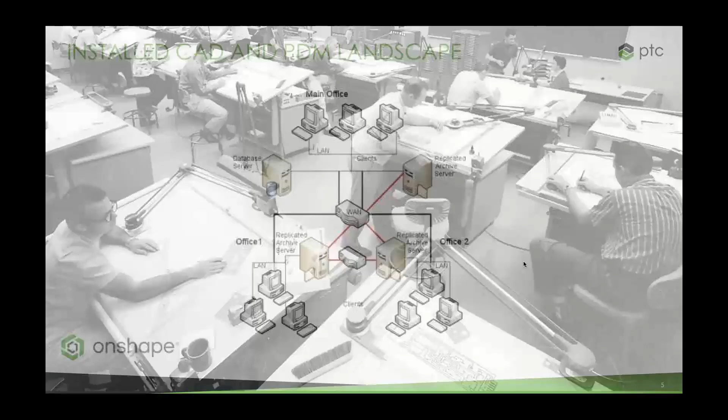But if you look at this drafting room, I love this image because it tells a nice story. This drafting room really isn't any different than what we're doing here, okay? There's a database server and archive servers. These archive servers, think of these as filing cabinets, right? These archive servers are where all the files are being stored in these filing cabinets.

If we go back again to the previous slide, we have a database server. The database server might be a logbook that one of the administrators is holding on to. You can see the administrators in the front of the room kind of keeping guard over the files in those drawers that you see right there. And when an engineer wants to take a drawing out, they go to the administrator, who notes who it is, they take the file out of the drawer, and they make a copy of it on a blueprint machine immediately.

And then the engineer works in the original, and they take their power eraser. You can see the Alvin tape dots and the brush right here for brushing off the erasures, coffee cup on the table and everything, right? It's kind of fun to see. I'm actually old enough to remember starting my days in this space.

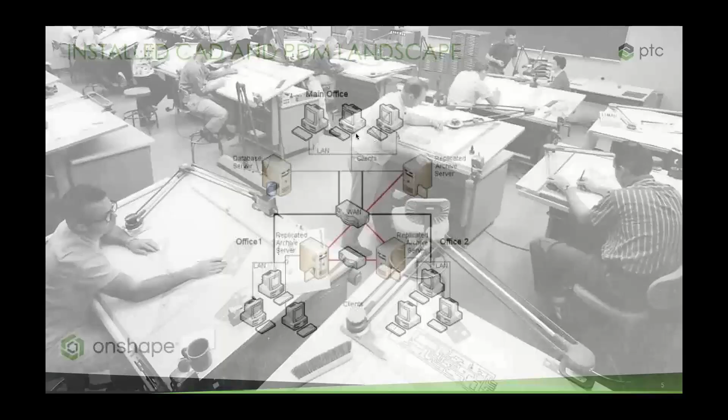But if you think about this room, when we went through phase 1 of digital transformation with CAD and PDM systems, all we did was really duplicate this file folder based process that you see on this screen right here, okay? And that was fine as a step 1, but we have better technology now.

We have database driven CAD systems like Onshape that don't even require you to take a file out of the file drawer. You can even have people essentially working all together on the same drafting board on a top level assembly together because of our database driven nature. A PDM system is a glorified file copy machine. It's essentially duplicating this entire process.

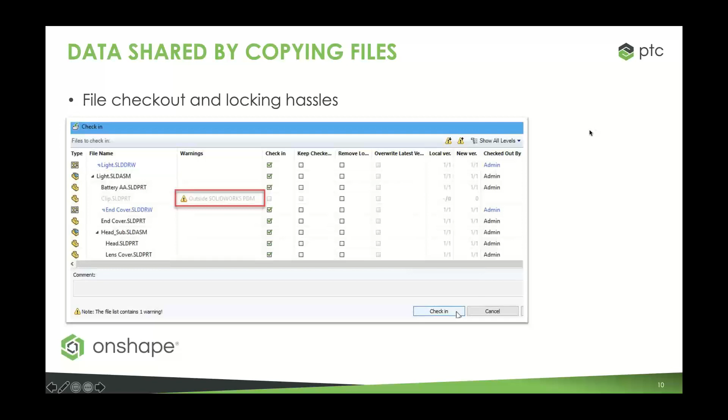So essentially, just to reiterate, a PDM system just duplicated that process of taking a file out of a drawer on the server in this case, copying the file to the local engineer's desktop, the drafting board over here, and they make their changes and then you put them back into the vault. That's all a PDM system's doing. At the core, there's workflow and other fancy bells and whistles, of course, but this is fundamentally what's happening. And there's a database that's the overlord of everything, watching and recording everything that's going on.

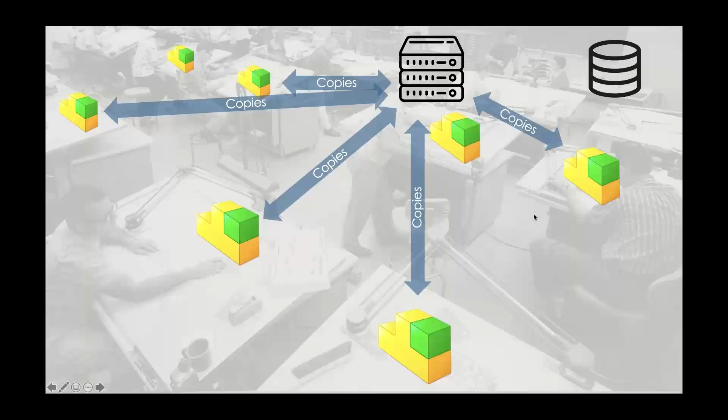And people are like, oh, well, why don't I just move that to the cloud? I'll put my PDM server and all my infrastructure hosted on AWS or Azure or something like that. It's the same thing. Still have all the file copies. In fact, it makes the problem worse for the engineer. It makes the IT guy's life easier because they've just smacked their hands and they're like, okay, nothing to do here now.

I'm good. So the IT guys put it on the cloud, which I commend them for because it's an efficiency. It's a way of saving cost and money. Electric bills and server rooms are pretty expensive. But the end engineers don't get any benefit whatsoever because their life is actually worse because the file copy time is slower because they have to go to the higher latency of a cloud file exchange.

Okay. And when Onshape put itself together, we decided that this wasn't going to be a tenable situation. So I'll explain how we did it. But let's reiterate the challenges to concurrent design a PDM system gives you as a company. Because of the checkout based process, only one person at a time can work on a file. PDM and a normal Windows file system is going to be the same thing, right? You can only have one person in any file at a time.

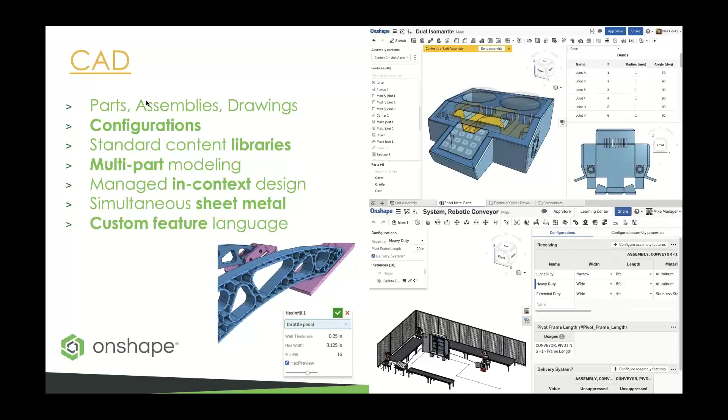So, to do this, though, we had to build a new CAD system to actually do it. So we have a CAD, like you're used to. It creates parts, assemblies, and drawings, and has the language of the everyday engineer taken into consideration. But we also included the data management at the core. So every user of Onshape gets version control from day one.

That's fully hosted. Every single change is recorded. You can go back, view, compare, and restore. You can even branch off of different design ideas to explore and iterate. This is very similar to GitHub, where you can create design branches if you're doing software code and things like that. But it's just built in at the core. So it's kind of even better than GitHub, because you're not managing code snippets and uploading them to a repository. Everything's happening on the fly.

So it's really an elegant solution for managing your data. The most elegant I think I've seen personally. The moment I saw Onshape and got wind of it, I quit my job and joined Onshape. That's how strongly I felt about this, because I just know how much of my life I've wasted installing software, managing services, servers. I hate to think about how many hours of my life I've spent on that.

It's years, years of life I've spent installing and configuring and maintaining software. And with Onshape, there's zero of that. I have nothing to manage whatsoever. Okay. Just need to work on designs and doing designs the right way, right?

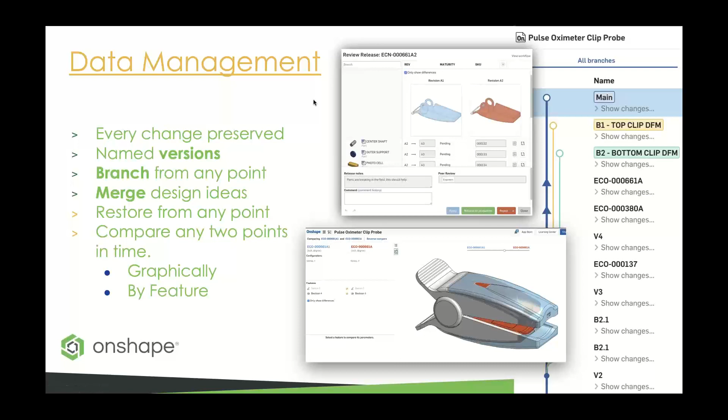But because we've moved this to a software as a service type solution where you don't have to worry about those things, there are other benefits now that you can pile on with this unfair advantage that we have now, right? There's communication tools built in, Google Docs style communication tools where you can see other people in a document and even work together at the same time, right? Have design reviews, comments built right in to the designs, and markups. Design review tools called the follow mode. I'll try to show that.

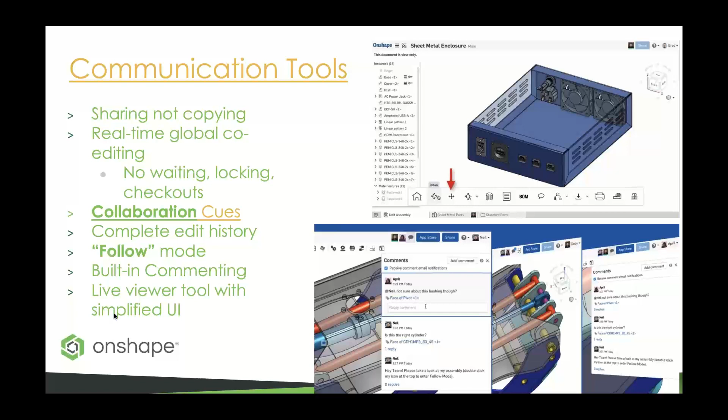And view-only users don't need to install fancy separate viewer software. The CAD system becomes a viewer for people that only have read-only rights to the design. So that's something that you get for being on SaaS and on Onshape.

And if you're Onshape Professional or Enterprise, so there's 3 levels of Onshape: Standard, Pro, and Enterprise. Standard's like for your single person consultant, but if you're on Pro or Enterprise, you get business process definition through workflows. Onshape Professional comes with a default workflow that works for almost any situation you can think of.

This also works on mobile. So you can access Onshape from any modern device. I'm running a MacBook. People run Chromebooks with Onshape. Of course, Windows platforms are supported, but iPad, iPhone, Android devices, there's an app in each app store for installing an Onshape app on Android or iOS.

And really, it's just the data, the touch layer, so you can use your finger. Everything else is on the cloud, so it's a tiny install. But on your computer, you just go to cad.onshape.com. If you're using an enterprise, you get your own special domain. So let's just hop into it and show you how this kind of works, going from this type of workflow to more of a SaaS workflow, okay?

So let's hop out of this. I have Onshape here on my MacBook. You can see I have the Mac right here. I have a Chrome browser loaded up here. And I'm in this design for a throttle system, right? Let me just hide this for a second, hide that for a second, make the design the hero here.

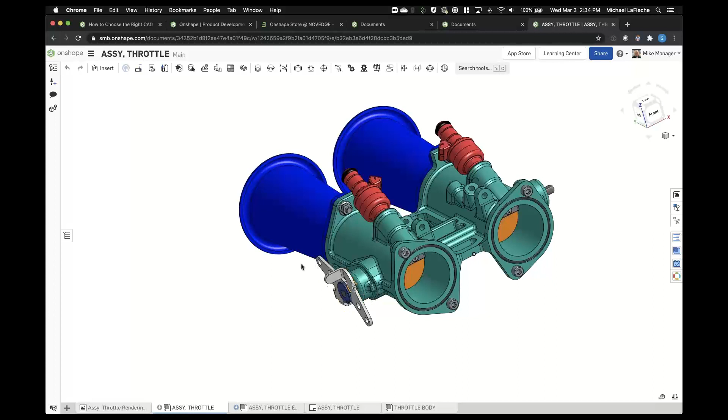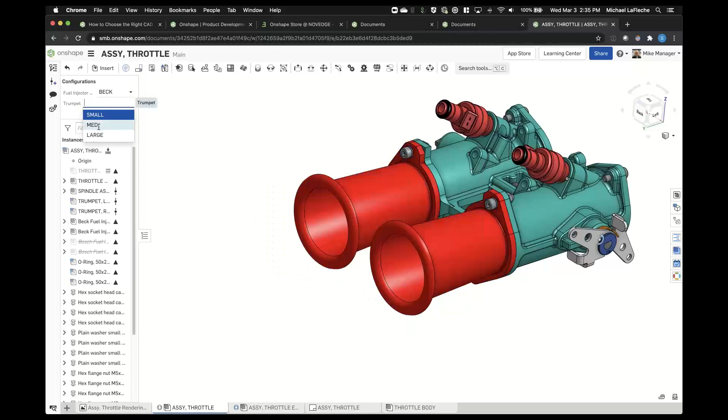And this is a CAD system, right? If I move this, it's going to open and close the inlets right here for the throttle, right? And that's a piece of sheet metal. These are machined parts. This is a casting with a machining operation. I have some trumpets here. Depending on what you're looking for, you might want to have small, medium, or large trumpets that are configurable. Onshape has variant-driven design that makes it easy to do what I'm doing here.

Maybe I want to use different types of fuel injectors. I might decide to install some Bosch fuel injectors, so I'll design those in a moment. But I have the Beck ones right here. So the CAD system is all here, but the data management is built in on the side panel. So the side panel shows me all of the changes that have been happening.

And this is something that PDM systems struggle with. If you do a file copy save as, or a pack and go, or copy tree, each CAD system calls it something different. You kind of lose the history of what that design branch iteration does, but in Onshape you don't. You see that history, and you can even merge the history into the main branch right here.

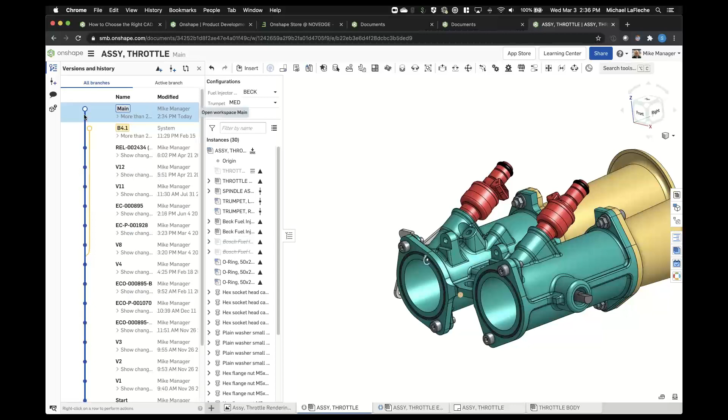The other benefit of having PDM for most companies is the where used report. So here I am on my main Onshape page where I sign in as a named user right here. Here is Mike the manager, right? And that's what Mike the manager has access to. Maybe Mike is interested in looking for the Bosch fuel injector, right?

So he's just doing a search in the system for the word Bosch, and there it is, the Bosch fuel injector. He can see where it is. He can open it. There's also great information that you can get. A lot of PDM systems offer this thing called a data card, or the item master information. So here, that's what I'm seeing.

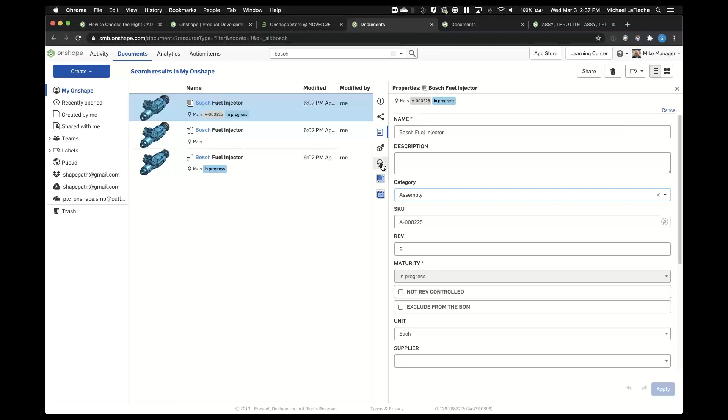I can actually click on the fuel injector, see it's an assembly, see the revision, date of it. It's in progress. It's not released yet. Here's the revision history. There is no history because it wasn't released. Here's where it might be used. It's not used anywhere. I know the Beck one was in use though, right? So if I search for the Beck fuel injector, actually I already did right here, I can get that report right here on the side.

And I can look at any place where I've released it. So I have a Beck fuel injector that was released under ECO 225, and it's used in this assembly, and I can open that directly from the CAD and data manager view into this right here. So it looks like I opened the assembly itself, but I already know it's actually used here as well. But I can also do the reverse here as well.

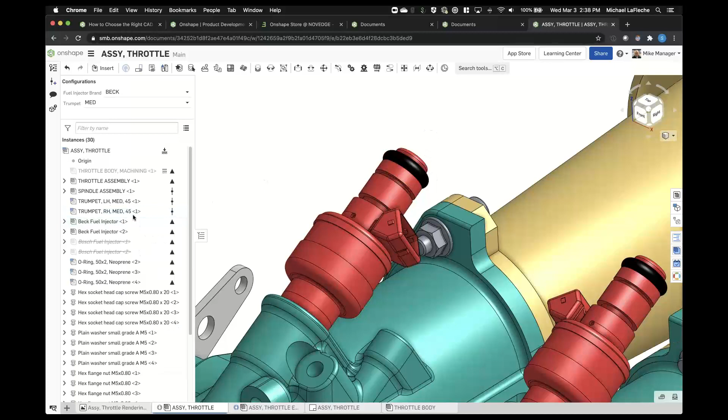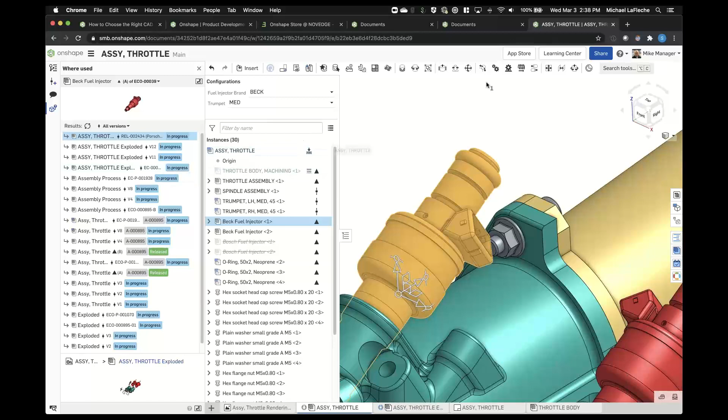I can see where else this fuel injector might be used from the CAD system, right? So if I just click here, there's the revision history, there's the where used, and I can run that where used in another way. And this is showing me all the versions and all the places where that fuel injector might be used. Maybe I only want to look at revised data, and I haven't used any revised items, only versions so far. So really pretty interesting that you can get this right at your fingertips without leaving the CAD system.

The triangles here show you the state of the design that we're using right here. Let's actually go in and look at the revision history this way. No revisions on that. Let's do this one. Nothing on that either. I'm picking the wrong ones, I guess, but that's okay. I'm going to show you how to create a revision in a second.

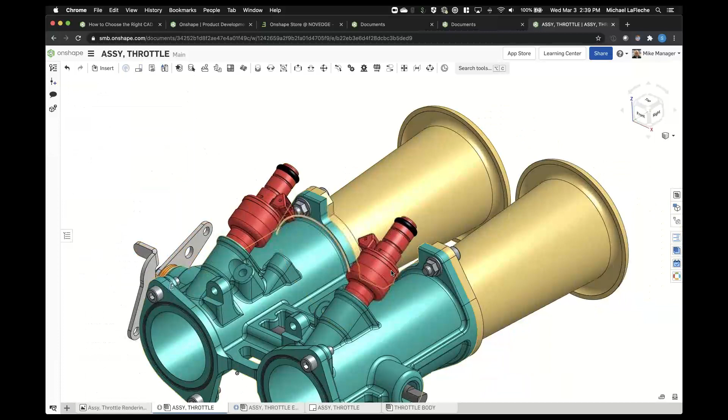So next thing I'm going to do is go to not the Beck fuel injector, but the Bosch fuel injector, because I want to add it to that design to have two choices of fuel injectors. So I'll open it up. And in this particular document, I have the Bosch fuel injector assembly ready to go, and I just want to get this approved and blessed for production, right? So here it is. It's 2 parts just like that. These are the parts that make it up. So let's release this.

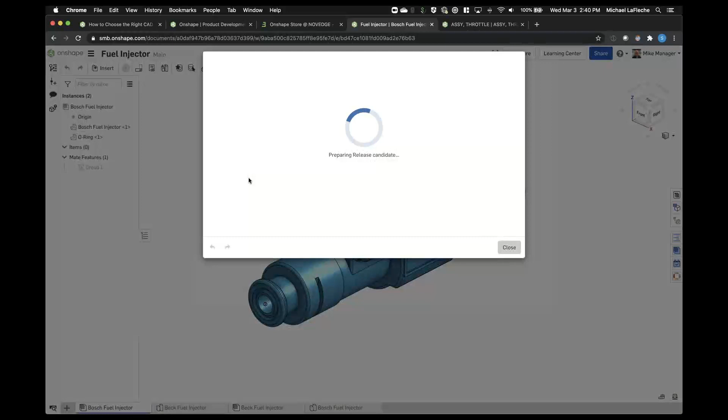And I can see here's the top level assembly for that fuel injector. It's going to go at Rev A, ready for use. The 2 items underneath it, the little O-ring and then the body of the fuel injector, are not revision managed. I've set that up so that when you buy this from Bosch, you're buying the whole unit. You're not buying the sub components that make it up. So I just block it from doing the revision management for that. And that's something you can turn on in Onshape.

And I'm just going to release this under some sort of change order number. I'm going to pick a number. You might have a system for this, but I'm just giving it an ECO number, and I want it to be approved by somebody on my team, right? I can give it to maybe Debbie, the designer, to approve this. She might be somebody who approves library parts. And I want to let the whole team of purchasing agents know that this is happening. And I'll submit it for review. And it will tell you that's being processed. This is the change management process.

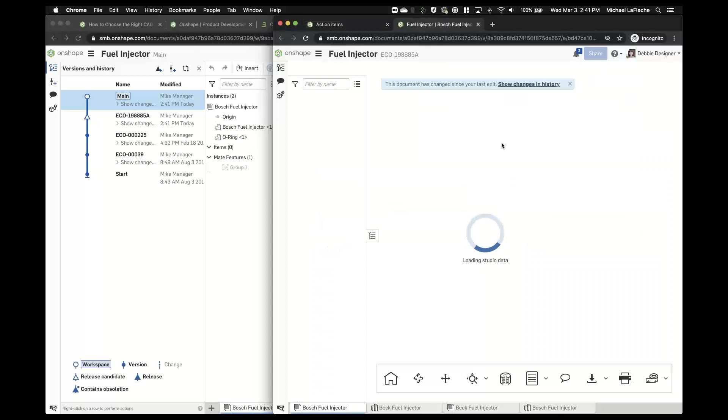We're going to see in the timeline view that ECO has an open triangle, meaning this is being worked on. Over here, Debbie, this is her window, and she's going to look at release actions, newest first. There it is, the fuel injector's pending. And she can view that release. She can click into here and make sure it's the right thing, of course. Just click on into it. So yeah, both windows, multi-window system. She can look at this, she can see it in a view-only state.

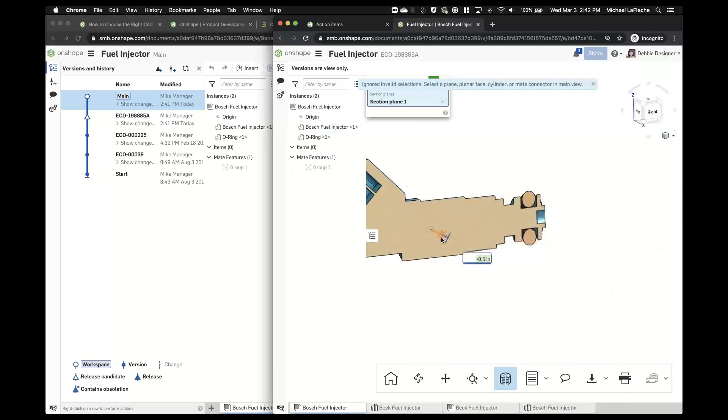She might want to do a measurement, to make sure it's the right size, right? So she'll pick these 2 things, hit this tape measure, and there's the distance right there. She can do section views right here, see what's going on. It's just a simplified model, so there's nothing inside of it. It's just that way from the vendor. They sent us a STEP file probably, right? And this looks good, Debbie.

So she's going to add a comment to Mike, the manager: Looks good to me. Make sure the label is applied to the side. And I can even tag where the label should be, and even do a screenshot if I really wanted to. That's importing one, but let's draw one on the fly.

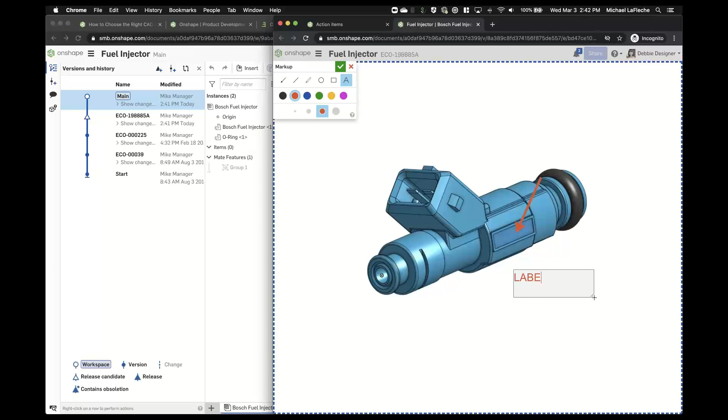Label here, right? And I can add that to the comment, right? So it shows Mike what's going on. Mike will get a notification in just a second that the comment has come through, or I know it's happening now, so I'll just hop right into it. And there it is. There's the comment in the ECO. And I can say sure thing. That's all happening as part of the ECO process, and I can resolve that comment, right?

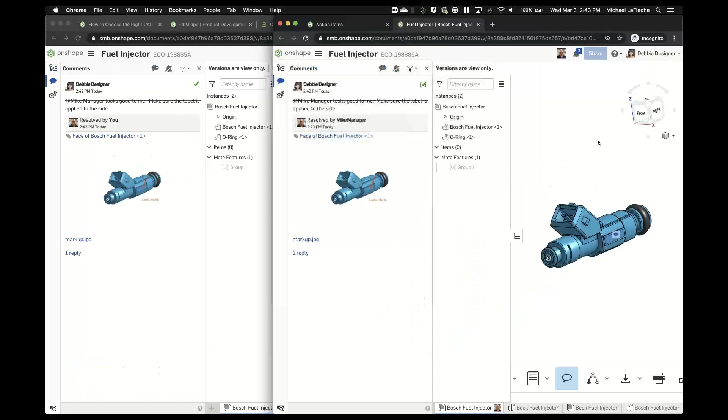Now Debbie is going to go in right here and approve it. So she goes to her approval, and she hits the release button, and immediately I can see it's entered the released state on Mike's screen. If I look at the timeline view, it's right here, ECO 19, whatever it is. And I can go to the assembly here, where I want to place it. I have a configuration set up waiting for this Bosch model to be added.

Now I can insert my recently released assembly for the fuel injector. So I know that it's made by a certain supplier, and I know it's Bosch. That metadata is already in the document. So I'm just searching my entire Onshape system for an assembly with Bosch in it. Well, maybe I didn't put it in there. I'll just search by name in this case. There it is. And I'll use the released one, of course, right? Rev A, drop it in here.

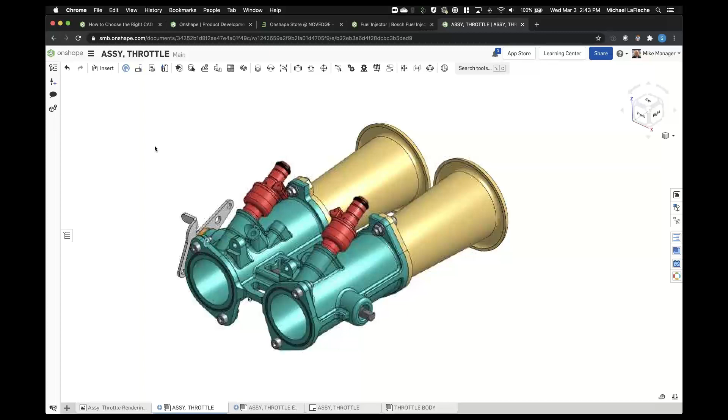So the CAD and the PDM are one, right? I'm just going to stick this in. I'm not exactly sure how it sits in here, but I'll just put it in right here and rotate it about, so it's coming in like that. It looks like a little interference there. Might need to fix that.

I guess that's why I'm not working in engineering anymore.

Let me just fix this. There's that mate. I'll just slide it back out again. Once I do it the right way, it'll be easier to do the next one because of something really cool that we have. All right, good enough for now. I just want to replicate. So a little bit of CAD, right? And I replicate the fuel injector somewhere else on the design right here.

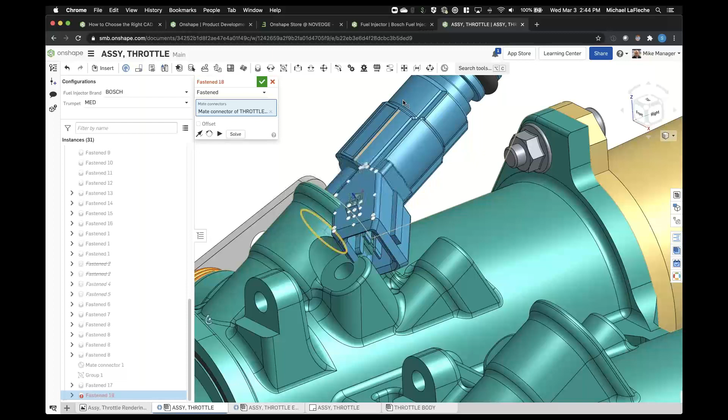I actually picked the wrong edge, so sorry. First day with my new hand, guys.

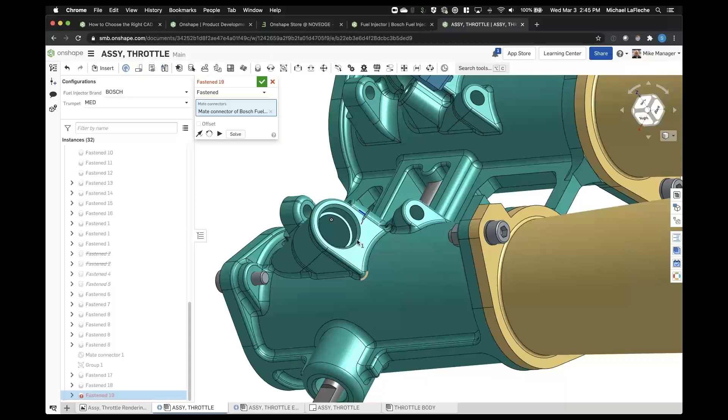I'll just put it in here. Perfect right there. Perfect right here. And we'll rotate it so the wiring comes into the inside, like that, right? And of course, my bill of materials is right here and up to date. So a lot of PDM systems have a bill of materials. So I'm getting the structured bill of materials view of this. There's my Bosch fuel injector showing up in the BOM.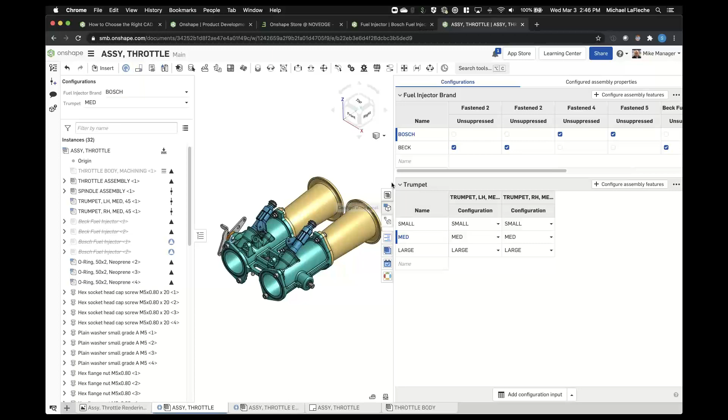But if I switch this to the Beck one, you're going to see the Beck fuel injector. And of course, I can configure whether I'm using the Beck or the Bosch fuel injectors in here as well. I haven't done that just yet, but I could if I spent a few more minutes on this. Very, very easy to do advanced configuration, control, and management here. It was almost like child's play. You didn't have to go to other systems and other windows to do this. It's all inexorably linked in here. There is no separating the CAD and PDM with Onshape. It's all the same, right?

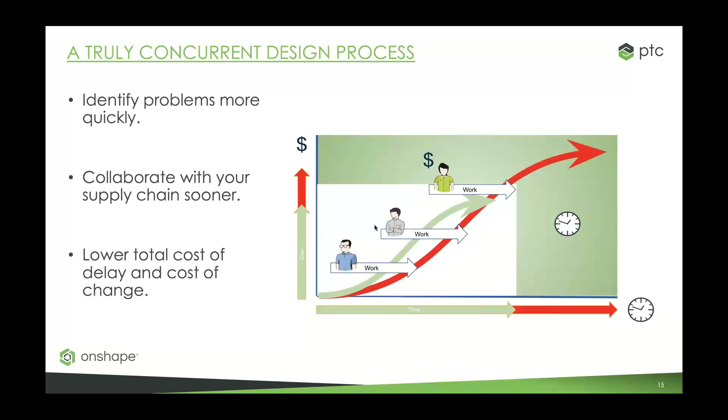So this is really the main definition of what's happening here: everything's hosted for you. You don't have to worry at all about this. I showed you how both Debbie and Mike were working on the design together. They could literally be in that same assembly and that same throttle, adding parts together. Debbie working on one part of it, Mike adding more parts. Everything's just going to be up to date, real time. And then the ability to use this release management workflow is really key.

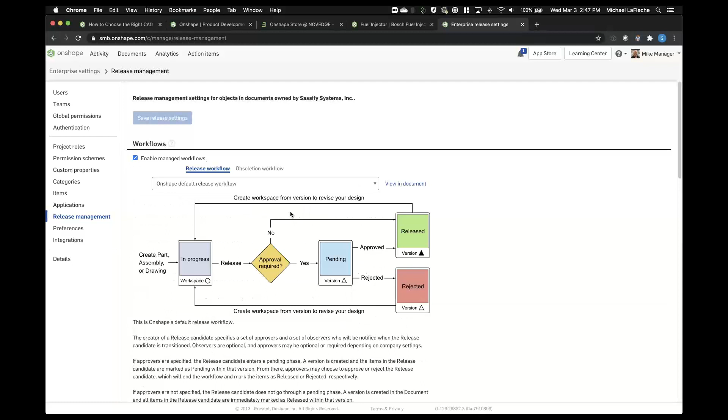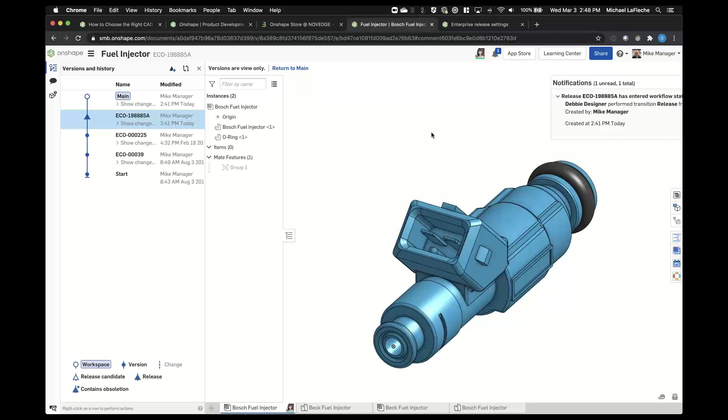You get to define that as an administrator in the system, right? So here's the release management, and you can define the way you want your workflow to happen, right? It's all just something you can define right here. How your revisions happen, how your part numbers happen, what the conditions and rules are. So you're controlling that right from the Onshape system as an administrator. You don't have to go to some separate tool to do that. It's all cloud-based management of that as well. All right.

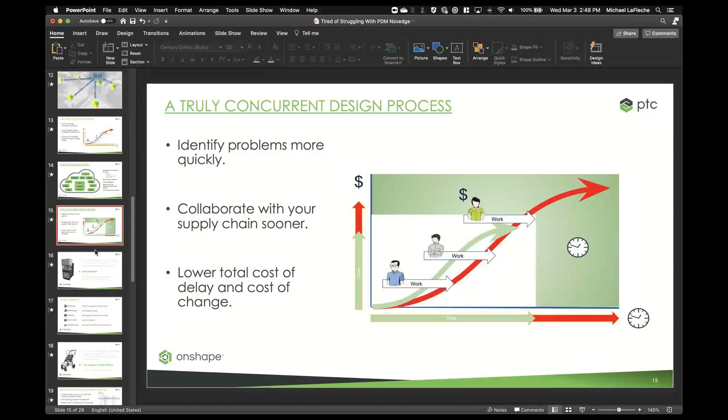So you have seen a very short demonstration. Of course, if you have more questions, we'd be happy to help. If you have any questions, think of them now while I wrap up the slide portion of it, and then we can open it up to any questions that do appear.

But if you look at this, the value of a SaaS platform, hopefully you've seen it, right? You can really transform the way you work with this system. The way Onshape works, it liberates you from having that old drafting room mentality with your PDM system. So you can do this more real-time problem solving no matter where you are in the world. All you need is a very light and basic internet connection to access it. It doesn't have to be anything crazy.

The bigger the assembly, the more internet you would want. But when I say big assembly, I'm talking thousands of parts, so probably 10 or 15% of the market makes assemblies bigger than 1,000+ parts. And Onshape can certainly support that.

Non-blocking release management. So people can continue to work on their designs even after a release candidate is proposed. You might even propose 2 or 3 release candidates, and 1 or 2 of them may win, and the other one will be discarded because it might not be the right time, or it might be a bad idea. Who knows? But you can see that and branch off and try out these different design ideas without blocking the